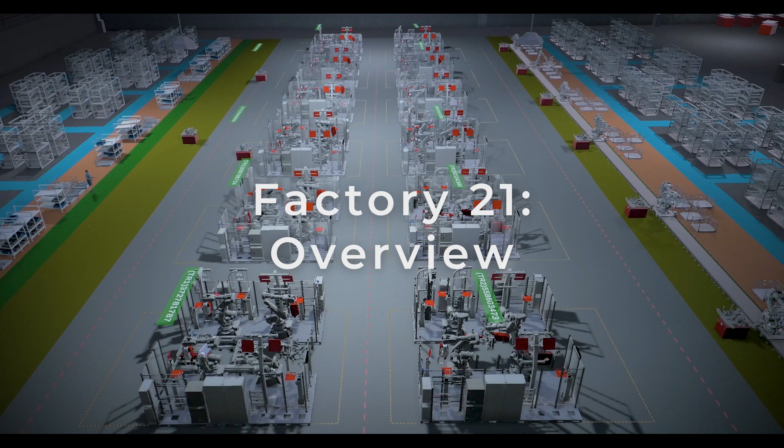Factory 21 is evidence that Gestamp is always on the move.

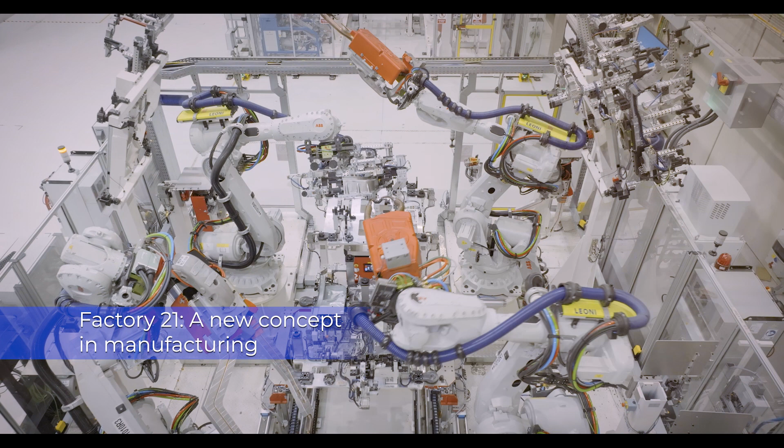The first Smart Factory pilot project encompasses a revolutionary concept whose main function is to create a flexible production flow, managing all available resources in real time.

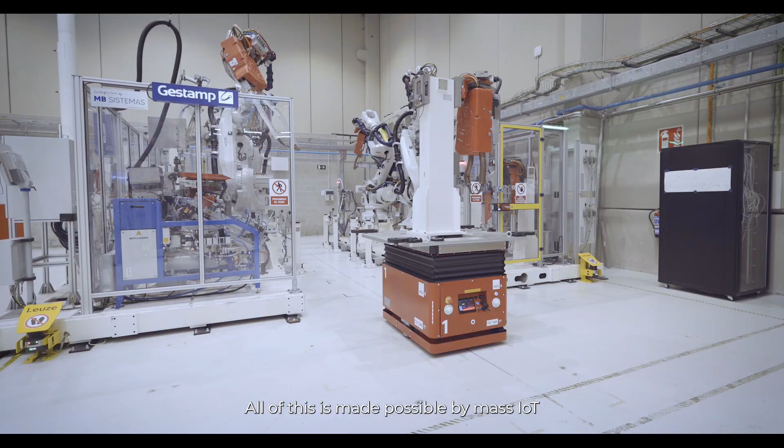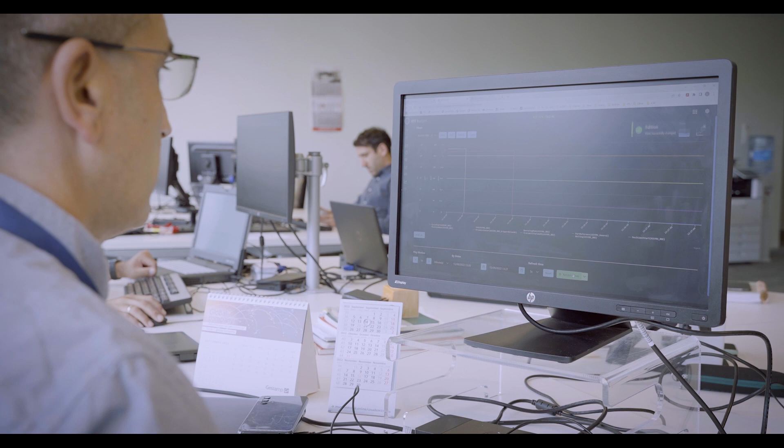Optimal data management through various layers of software and artificial intelligence, as well as the use of traceability systems, makes it possible to link the physical world with the virtual world, interacting with equipment, products, and people.

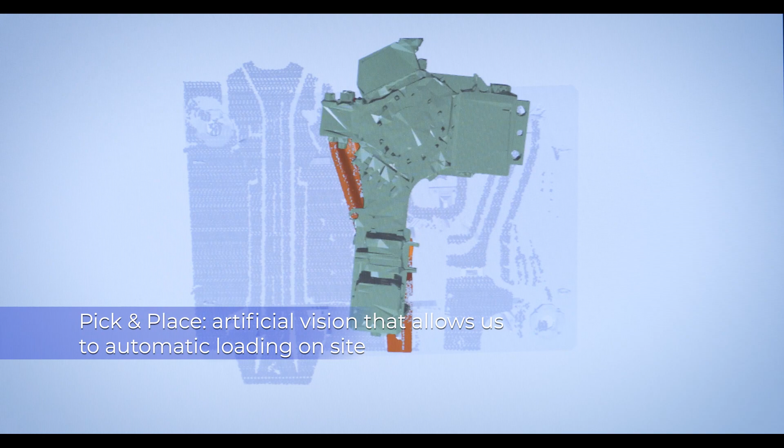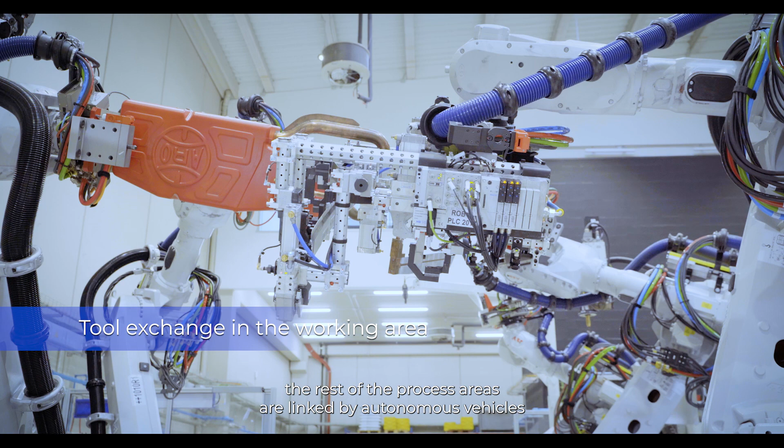These new modular assembly facilities are distributed throughout the production area in a matrix to be able to manufacture any type of product. The rest of the process areas are linked by autonomous vehicles within the production system.

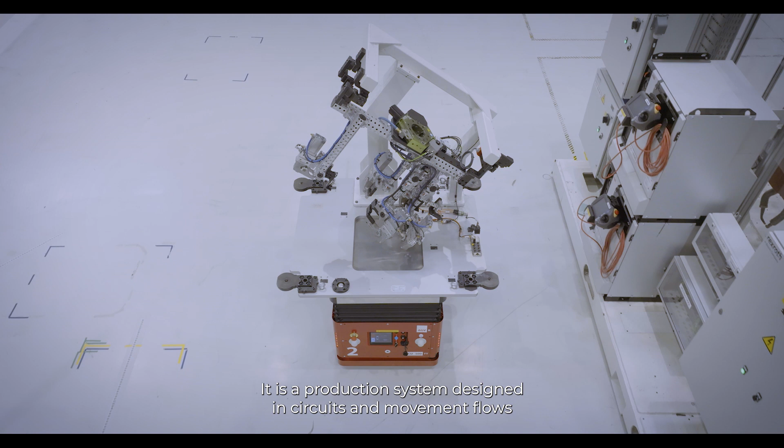It is a production system designed in circuits and movement flows between the different process areas: kitting area, assembly cells, quality control cells, and racking area.